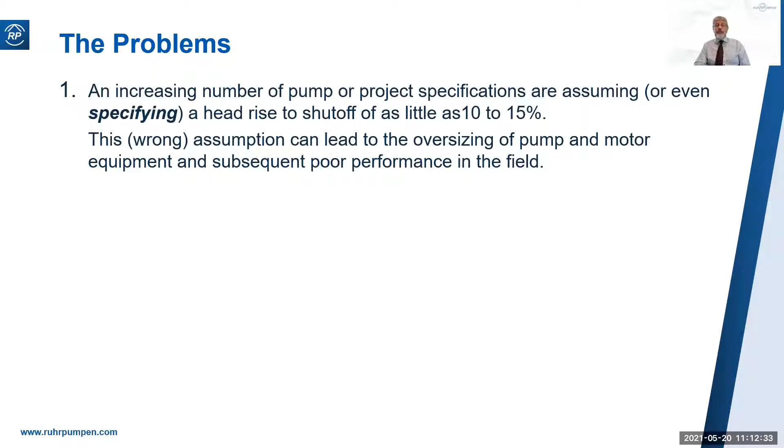Secondly, many specifications, especially those for transfer or loading services, are specifying zero negative tolerance on TDH. Their concern is in trying to meet the contractual guaranteed output flow in the event of a negative tolerance on the TDH condition. They're worried they won't meet their guarantees.

These can seriously impact the design and price of the equipment and of downstream equipment. We will show you the impact of these on equipment selection, reliability, price, and on downstream equipment.

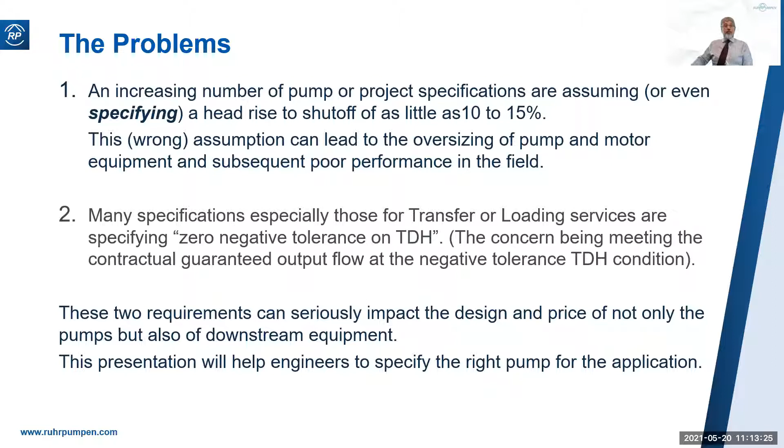So let's start with what API 610 says. It defines the pressure rating of the pump casings. It says the maximum discharge pressure shall be the maximum suction pressure plus the maximum differential pressure that the pump is able to develop with the furnished impeller, the rated speed, and the specified normal SG. So this means shut-off head with the rated impeller.

In section 6.3.2, it gives you options for using the maximum specific gravity in this calculation, and frankly that is the usual case—most specifications require it on max SG, and I agree with that. You also have the option to do the calculation with the max diameter impeller instead of the rated impeller, though you don't see that very often. And the option is there for calculating it at the trip speed, which would be applicable if you had a steam turbine driven pump.

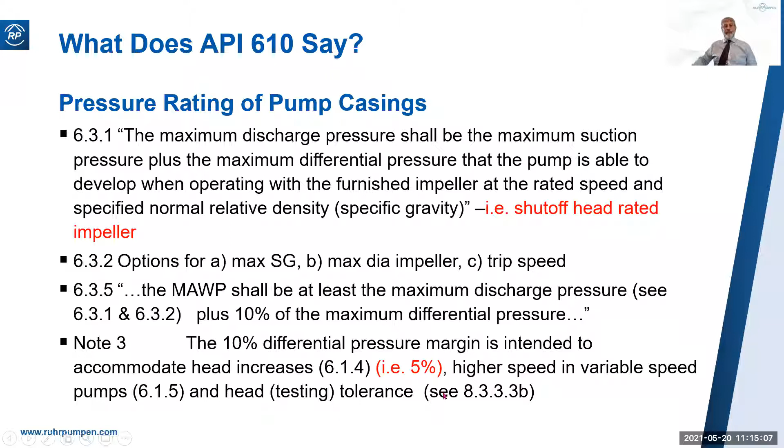So the MAWP shall be at least the maximum discharge pressure as calculated, plus 10% of the maximum differential pressure. This 10% margin is intended to accommodate future head rise by fitting a larger impeller, i.e. 5% head rise by fitting a larger impeller in the future, and higher speed if it's a variable speed pump, plus the testing tolerance per this paragraph.

Here is what 8.3.3.3b, table 16 has to say. At the rated point, the tolerance is plus or minus 3%. At shut off, it's 10, 8, or 5%, depending on the total head. The power tolerance is plus 4%, and this tolerance encompasses loss of efficiency and loss of head. So it's a combination, 4%.

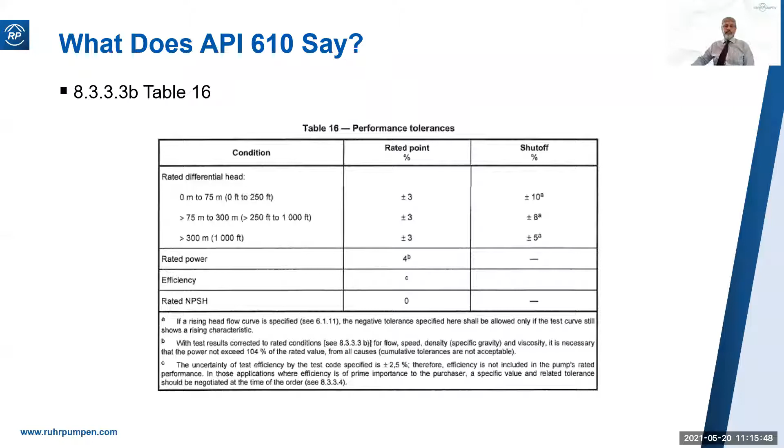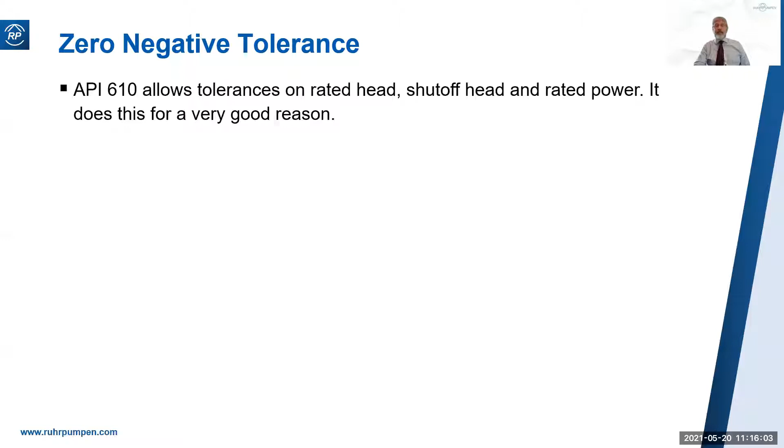So what does zero negative tolerance do to us? API 610 allows tolerances on rated head, shut-off, and rated power, and it does it for a very good reason: that is the reality of manufacturing. Semi-engineered pumps aren't built from investment castings, and variations between batches of castings is inevitable.

Also, it's impossible to accurately measure shut-off head. In most test stands, the test engineers will take the flow back as far as they can to get a reasonably accurate reading, and then they'll extrapolate it the rest of the way. As you approach shut-off, the pressure gauge just wobbles and pulsates, so it's impossible to read it accurately. That's why they take it back as far as they can, get a decent reading, and then extrapolate it the rest of the way. This is, of course, one major reason why the test tolerance at shut-off is greater than it is at rated flow.

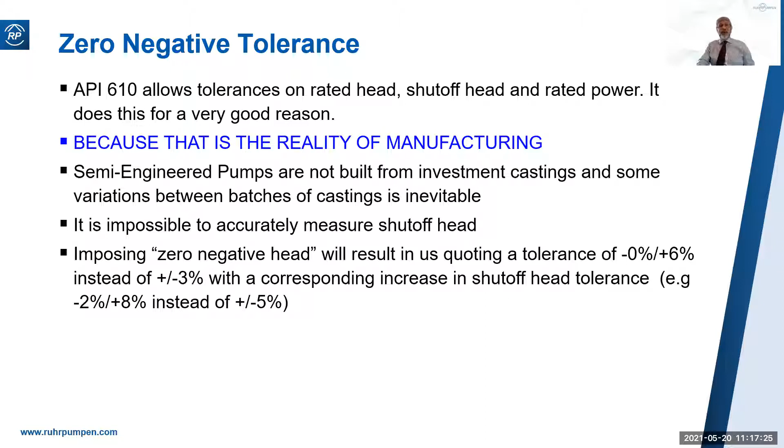So what will happen if you impose zero negative head on us? Instead of quoting per API 610 with a tolerance of plus or minus 3%, we will quote a tolerance of minus 0 plus 6, because we still need those 6 percentage points of safety margin to be able to manufacture the pumps. Correspondingly, the shut-off head will go up by the same amount. Basically, what we've done is move the whole curve upwards. This, of course, impacts max allowable working pressure and the rated power.

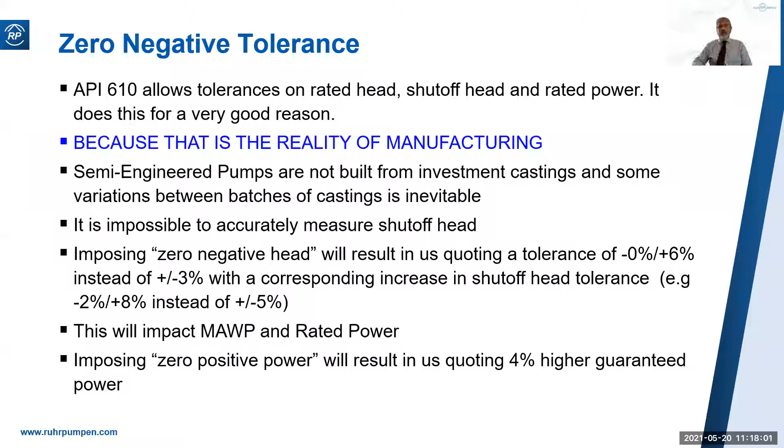So what will happen if you impose zero positive power on us? Well, it just means we're going to quote 4% higher as the guaranteed power. We need those tolerances. Manufacturing needs tolerances.

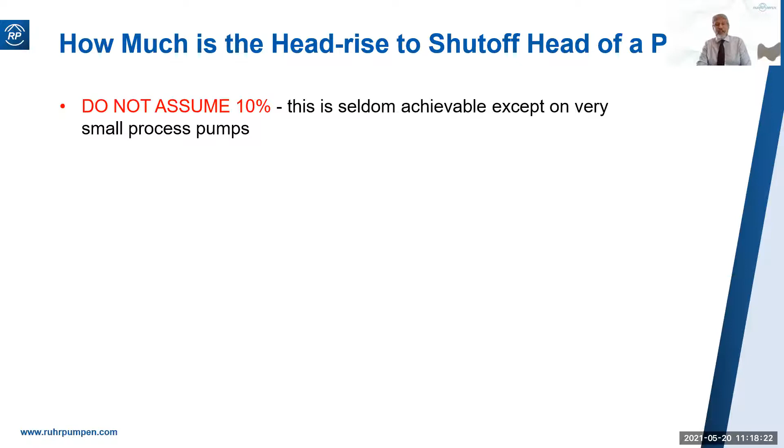So how much is the head rise to shut off of a pump? What should you be allowing? Here's the golden rule: do not assume 10%. This is seldom achievable except on very small process pumps. Typically, you'll find it's in the region of 115 to 130% for most pumps. Vertical pumps, VS1s and VS6s, it's more likely to be in the region of 140 to 150%. So if you assume 10%, you're in trouble before you started.

Now, when pumps are in parallel operation, API 610 requires a 10% head rise to shut off. We recommend at least 15% is better. The steeper the curve, the more controllable pump operation is.

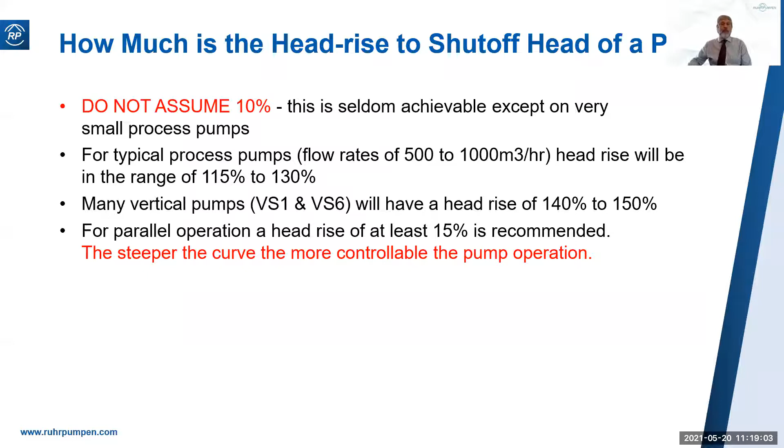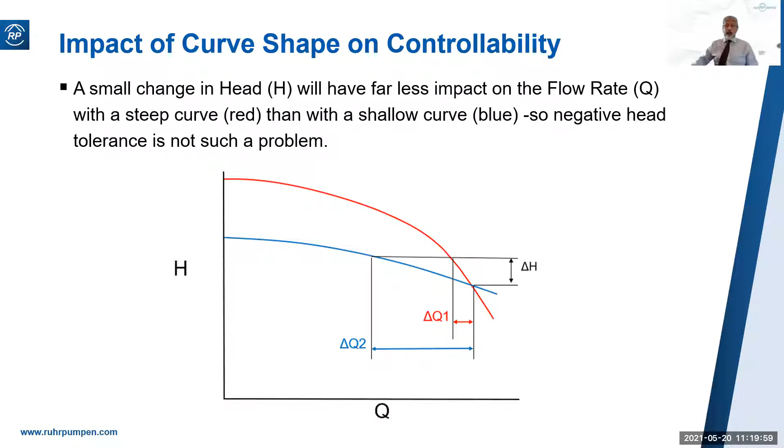Here is why. Here we see two HQ curves, a steep one in red and a shallow one in blue. A small change in head will have far less impact on the flow with a steep curve than it does with a shallow curve. So a 3% negative tolerance on head will have much less impact on flow if you have a steep curve. Similarly, small changes in the system head from the predicted head, i.e. the TDH that the system is actually demanding in the field rather than the calculated value, will have much less impact on flow if you have a steep curve.

So what max allowable working pressure should we be specifying for downstream equipment? Well, you should start with the rated differential pressure. Assume a 30% head rise, unless you know otherwise. If you've got a pump curve that someone sent you already, then of course go with that. But if you're working in the dark, assume 30%, or 50% if it's going to be a VS1 or VS6 pump.

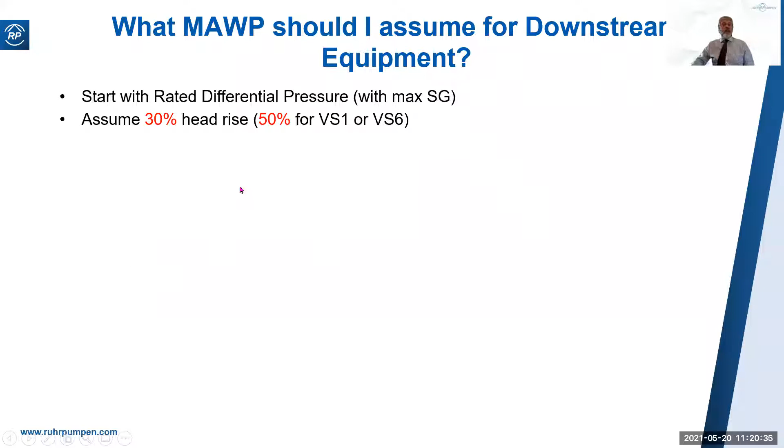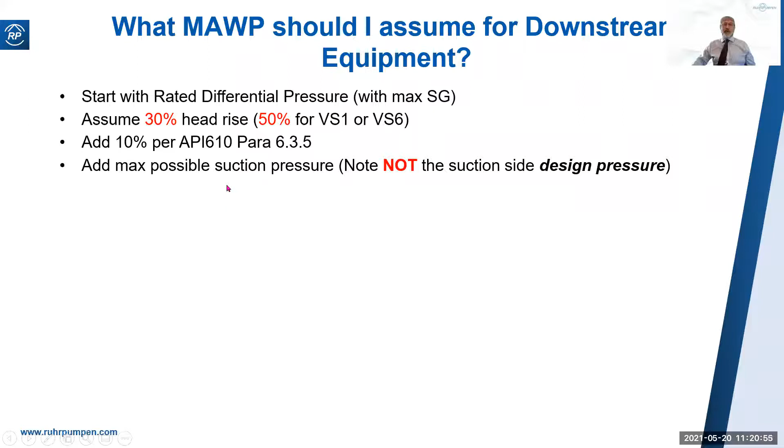Add your 10% margins. Add your maximum possible suction pressure - note, not the suction side design pressure. You might well be designing that for, say, 19 bar when the maximum possible suction pressure is only 4 or 5 bar. If this calculation brings you close to a flange break - 15 bar, 45 bar, 90 bar, or 135 bar - then you know to consult pump vendors to get more accurate figures and recheck your calculation.

Do not specify zero tolerances because we can't do it. Or if you have no choice and it's been imposed on you by your client, then discuss the implications and options with the pump vendors.

Incidentally, these pressure ratings are all based on A216 WCB steel or A105 forged plate at 150 degrees centigrade. If you're going to be higher temperature or different materials from this, you obviously need to adjust those figures.

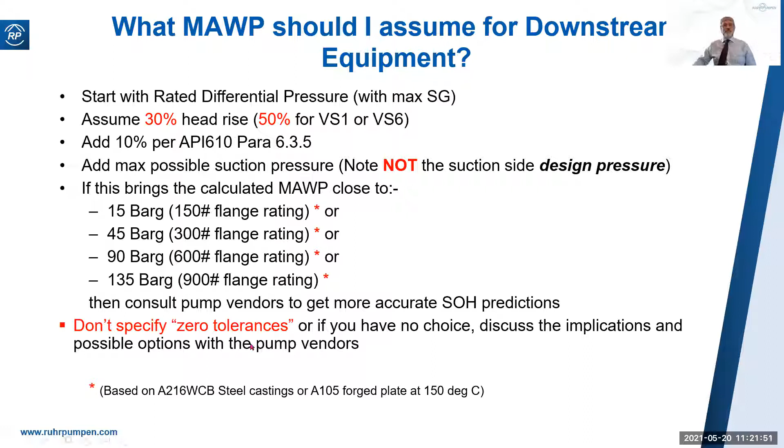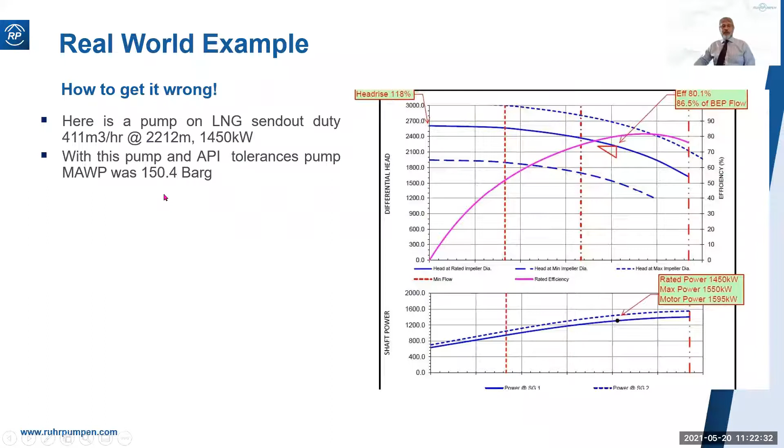With this pump, it had 118% head rise to shut off. With this pump and API tolerances, the max allowable working pressure was 150.4 bar. Now, this is the selection that I tabled at the feed stage, right at the very beginning, and told them

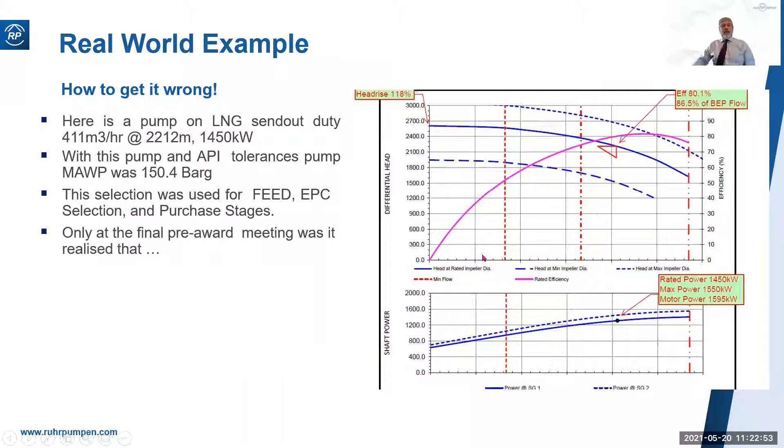what the head rise would be and what the max allowable working pressure was going to be, about 150 bar. The PMC, however, had assumed a 10% head rise to shutoff with 0 positive tolerance on the shutoff head, and he set a downstream pressure rating of only 130 bar. 130 bar when we were telling them it was going to be 150 bar.

Unfortunately, the EPCs weren't listening to us and they didn't pass it on to the client. So we're at the final pre-award meeting and we find that it still said 10% head rise, 0 positive tolerance, but it gets worse. To ensure parallel operation, they had insisted on 0 negative tolerance on shutoff head as well.

So not only did we have to achieve a 10% head rise to shutoff, which we couldn't do because we were at 118, but it had to be exactly 10% head rise. Nothing, couldn't be higher, couldn't be lower. Exactly there, no negative tolerance, no positive tolerance.

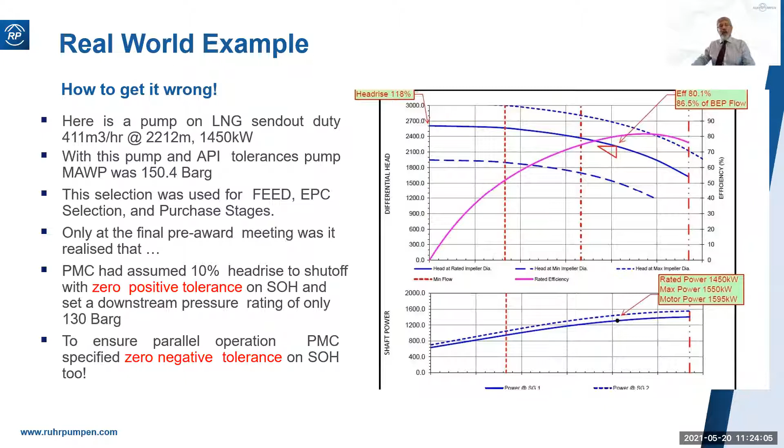Well, we went away from that meeting overnight and came up with a compromise solution. Here is the pump we came up with overnight. We managed to get the head rise to 110%, but we still needed manufacturing tolerances, plus or minus 5% on that. So that took his max allowable working pressure to 136 bar. Remember, he wanted 130, and ideally we wanted 150.

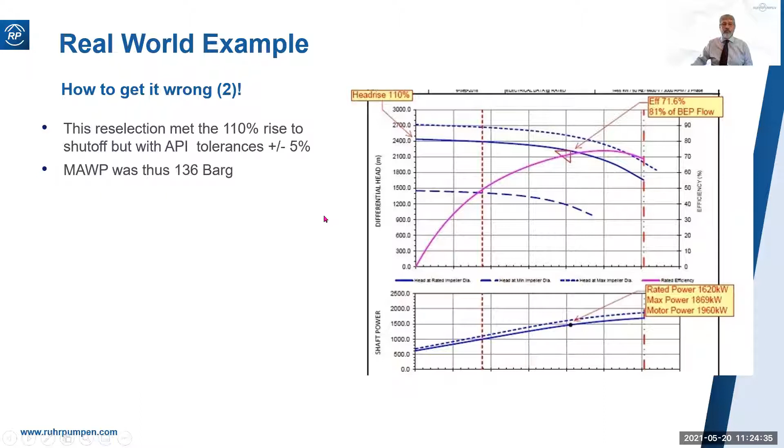This selection is away from BEP. It has lower efficiency. Rated and max power are significantly higher, and the motor rating significantly higher as well. Really not a good situation. It was going to cost a lot more money.

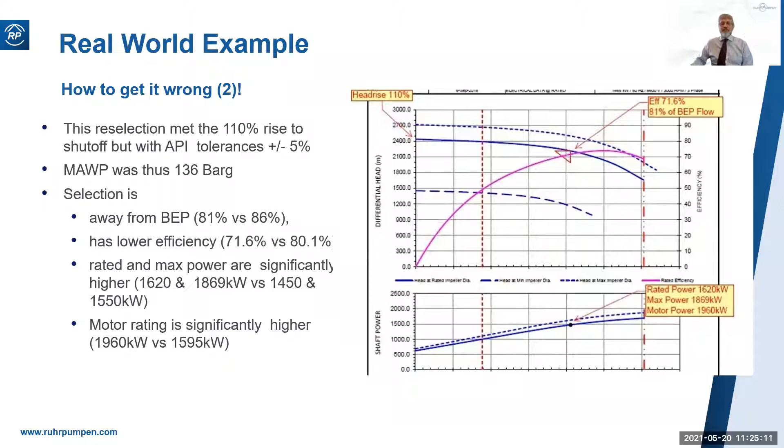Mercifully, we lost this order in the commercial negotiations, so we didn't need to build this impossible pump they were demanding.

Here's another example of how to get it wrong. Here we have the perfect pump. Right on best efficiency point, nice high efficiency, 80%, head rise, 135%. Actually, this is a vertical VS6 pump, so 135% head rise is actually quite low. It's quite good. It could easily be 140 or 150%.

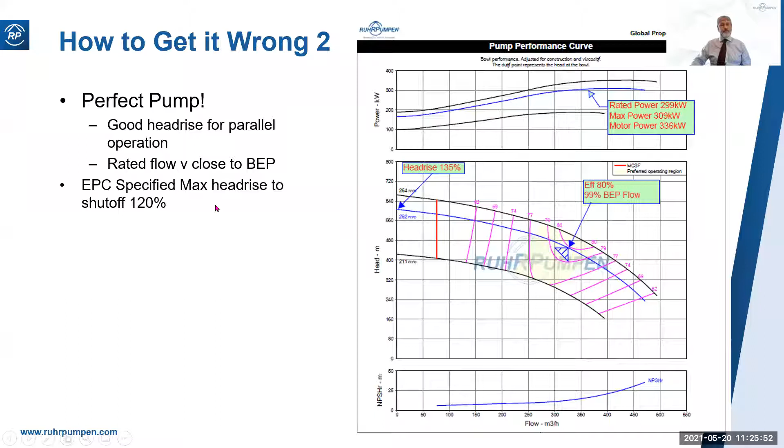But the EPC had specified a max head rise to shutoff of 120%, and he specified 0 negative tolerance on the rated head.

So this meant that we shifted the curve up. We quoted a tolerance of -0 +6 instead of plus or minus 3. And this had the knock-on effect of increasing the shutoff head tolerance to -2 +8 instead of plus or minus 5. So the max allowable working pressure did go up from 39.2 to 40.4. That wasn't such a big deal on this occasion. It didn't take you into a different flange rating, at least.

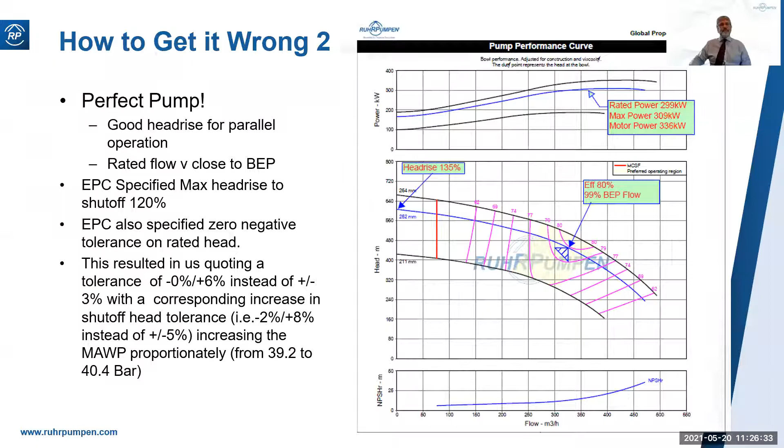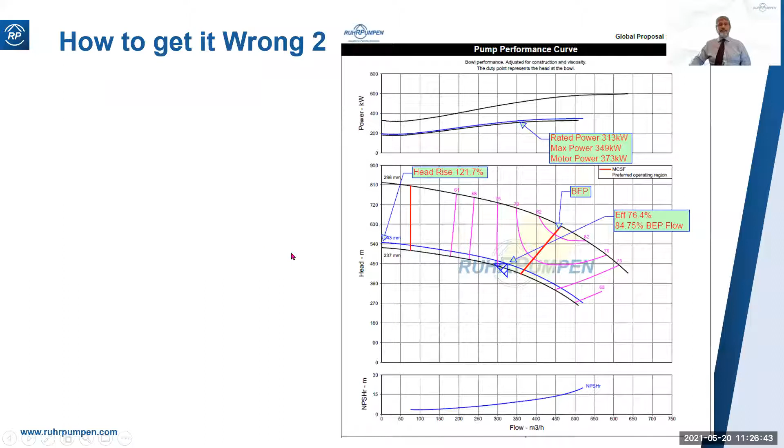So again, we went away and we looked for an alternative pump, and we came up with one, and here it is. The compromise selection. It's the next frame sized up pump. Big price impact.

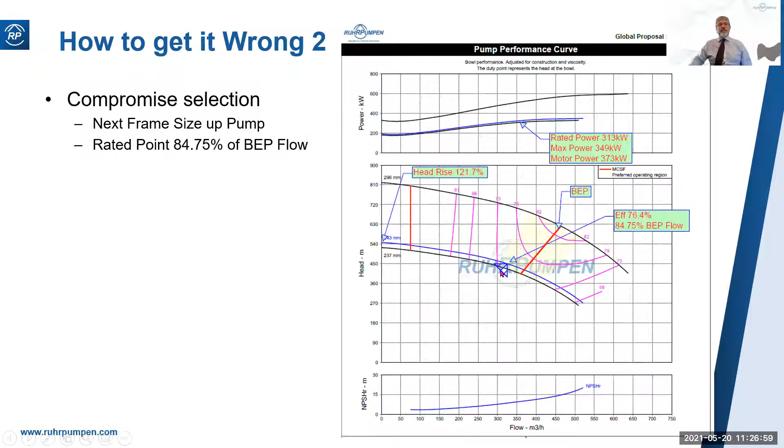The rated point is at 85% of best efficiency point flow, so we're just within the preferred operating range, whereas before we were at 99% of BEP flow. Efficiency is 3.5 points lower. The power is 27 kilowatts higher, and the motor rating is 37 kilowatts higher.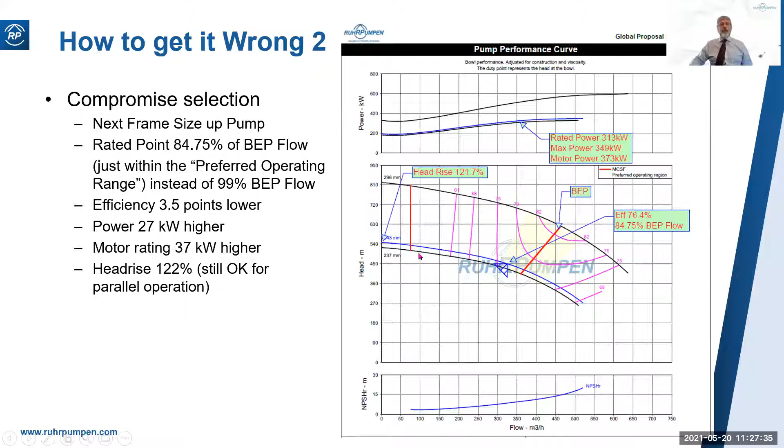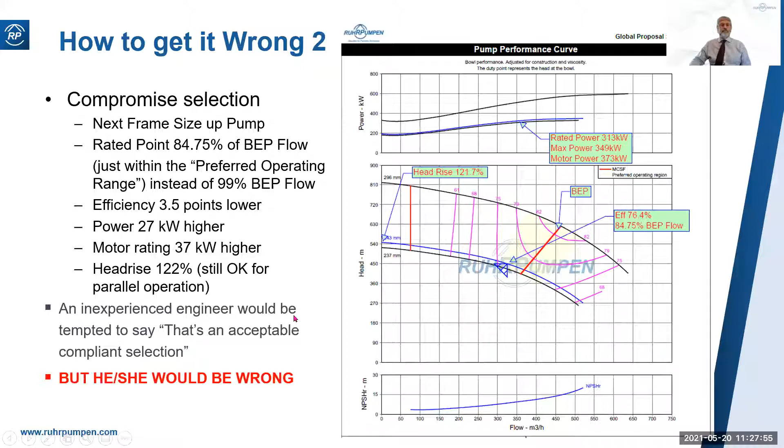Head rise, 122%. They wanted 120%. It's still okay for parallel operation. We thought we might be able to get away with this. And quite frankly, an inexperienced engineer would be tempted to say, hey, that's an acceptable compliant selection. You know, you're within the preferred operating range and the head rise was 122%. Yeah, that looks okay. But he'd be wrong. And here is why.

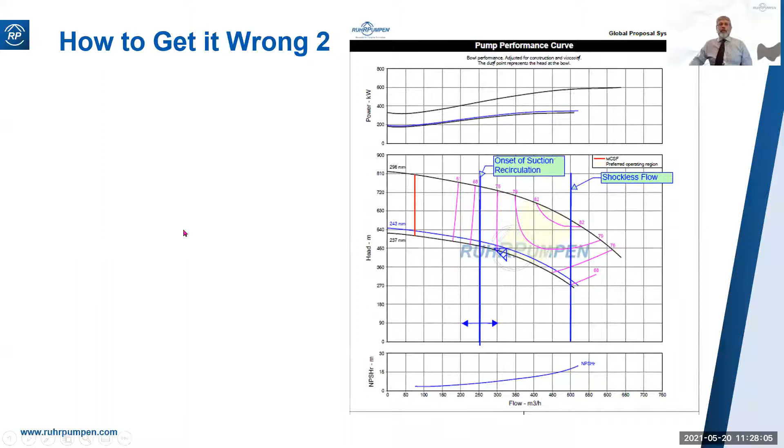To explain it, we'd like you to understand the concept of shockless flow. This is the flow rate at which the flow into the impeller impinges on the inlet vanes at the optimum angle. It's normally close to the BEP flow of the full diameter impeller.

Now, trimming the impeller has no impact on the shockless flow rate, because it is decided by the inlet geometry to the impeller, not the outlet geometry.

Onset of suction recirculation is generally around 40 to 60% of this shockless flow rate. So the rated duty point might be at 85% of BEP flow, but it's at 65% of the shockless flow.

This selection's a train wreck waiting to happen. It's probably okay on a small, low energy pump, a 2-inch or 4-inch pump at 6 to 8 kilowatts, but definitely not on a multi-stage 350 kilowatt pump like this one.

I would advise you to avoid selections near the minimum diameter on medium and large pumps. And if you must select close down, if you're forced to select down there, make sure that you select to the right of BEP.

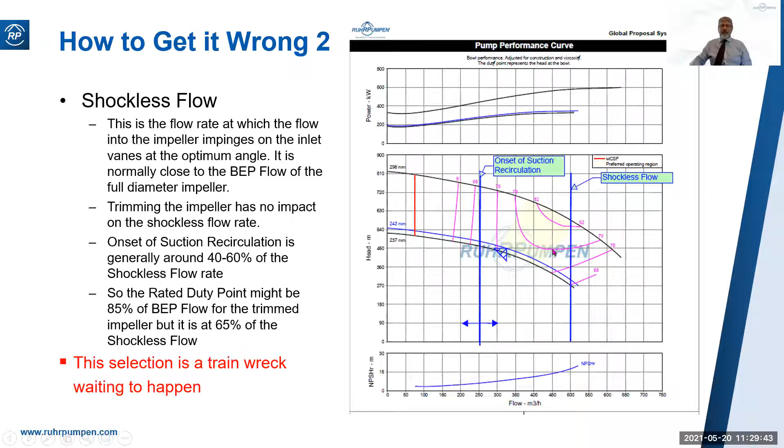Here is an illustration from Karassik of suction and discharge recirculation. Note that suction recirculation is not impacted by impeller diameter - it's solely down to the inlet geometry of the impeller. Discharge recirculation is trim dependent; as this gap gets bigger, there's more recirculation.

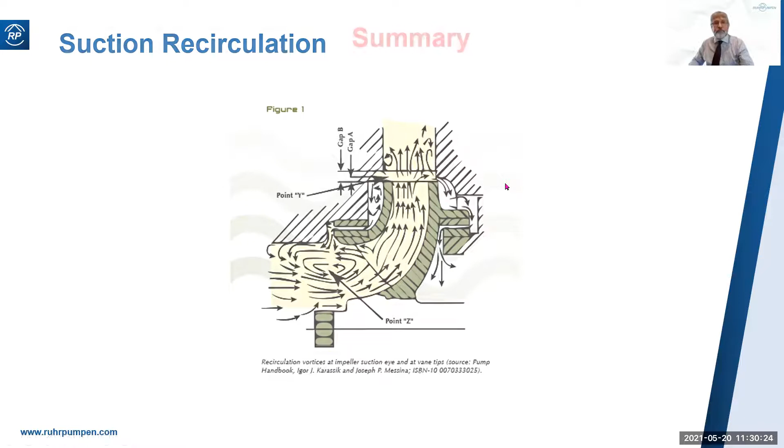Well, that pretty much finishes session 2. I hope I've been able to get across to you the importance of the following 6 key requirements.

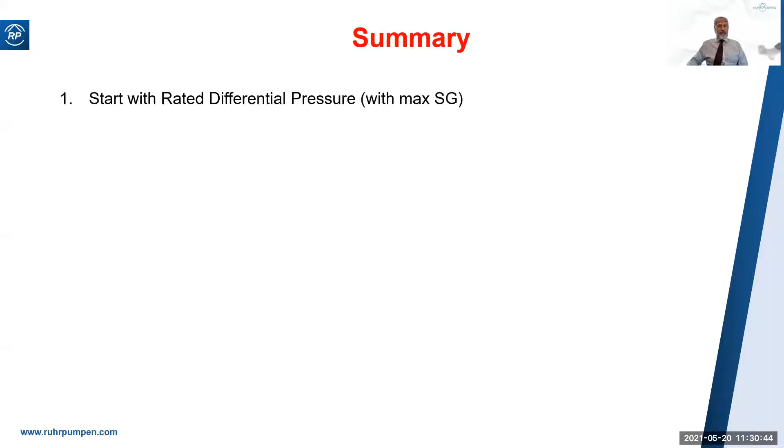Start with the rated differential pressure, max SG. Unless you've got a curve that shows you something different, assume a 30% head rise, or 50% if you're a VS1 or VS6 pump.

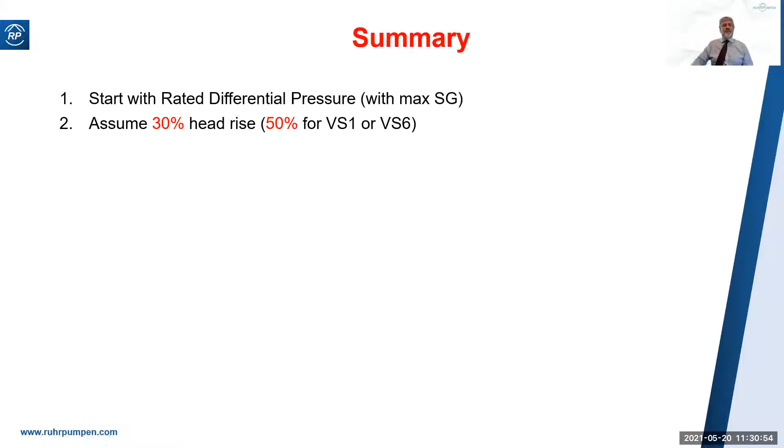Add your 10% margin per API 610, 635. Add your max possible suction pressure, and that gives you your max allowable working pressure. If it is close to a break between flange ratings, consult the pump vendors to get more accurate shut-off head predictions.

Do not specify zero tolerances, or if you're forced into it by your client, discuss the implications and possible options with the pump vendors.